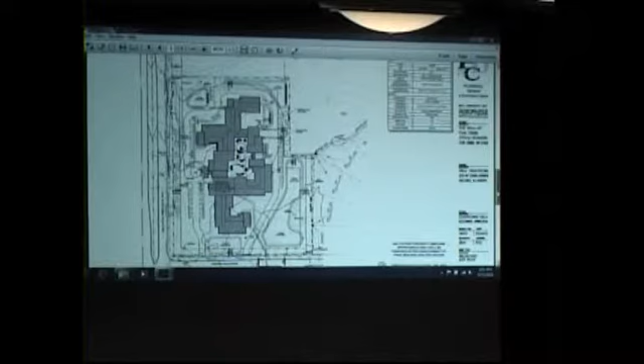In senior living terms, it ranges anywhere from independent living apartments all the way up to assisted living and finally skilled care nursing. It's based on the level of care and how much daily assistance residents require. For a skilled nursing facility, staff supervise residents 24/7, with reduced shift numbers at night. Skilled nursing requires the greatest amount of care in the senior living spectrum, so yes, it is a nursing home.

But by the same token, is there kind of independent living going on too? This will not have independent living. It will all be skilled nursing. Okay, so it's a nursing home.

Okay, other questions or comments? I see none. Need a motion on 4A.

Going forward, is there anything else from the public, Steve? If you have a comment, you can come up and express it. I just have one more comment too. Sure, go ahead.

We gave our thoughts that 96 stalls would be fine for the development. I also have some questions on the architectural portion, though I believe I have an earlier version. It states the facade of a manufacturing, commercial, office, or institutional building shall be finished with an aesthetically pleasing material, with a minimum of 75% of the perimeter finished with glass, brick, or decorative masonry. That's quite a high percentage compared to what I've seen from other cities.

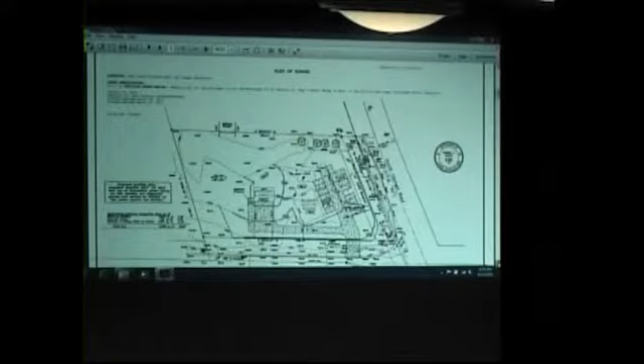This request is for site, building, landscaping, and lighting plan approval for the mixed-use building, which is at the location shown in red on the screen. This gives you an idea of the proposal, a two-tenant or mixed-use building. It'll be split right down the middle, so the business portion will be on the east side and the residence will be on the west side, including parking along the east and a private garage with dumpster location on the west.

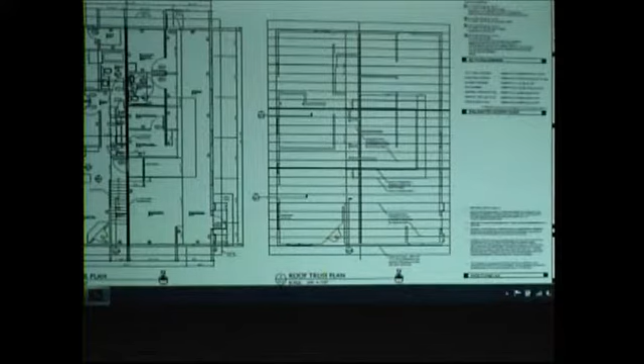To give you an idea of what the building will actually look like, this is a floor plan showing again that the business portion is on the east side and the residence with a full basement is on the west. It's a single-story building with the exception of the basement, about 2,000 square feet. This gives you an idea of what the building will look like.

Just lost my place, sorry.

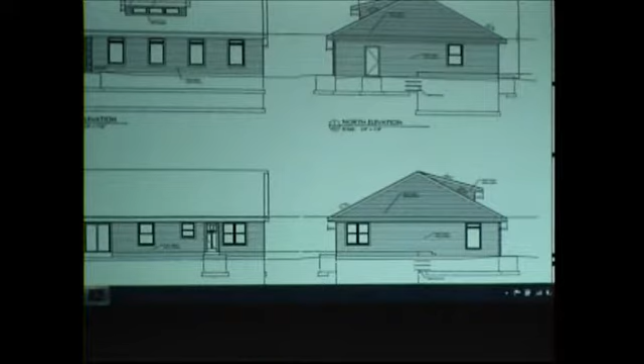Fiber cement siding on all elevations. There is going to be an entrance enhanced with veneer stone pilasters and sconces. So if we're looking at the entrance to the business portion, it'll be right here. Again, siding on all elevations, and this is going to be architectural shingles.

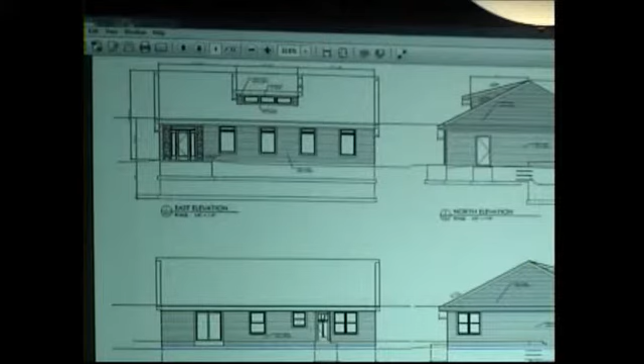Residential quarters for an owner of a building and business, not exceeding the floor area for a business within the same building, is permitted as an accessory use in the district. There is one error: B4 is actually the highway business district, not the local business district, as was stated on the plans. There will be an 864 square foot detached garage, again for private use, that will not be counted as part of the parking for the business.

Sheet A5.1 actually does not show the correct scale of the garage, which is depicted on the screen before you. That needs to be changed, because at the current scale it scales to above what is allowed for the maximum height of an accessory structure.

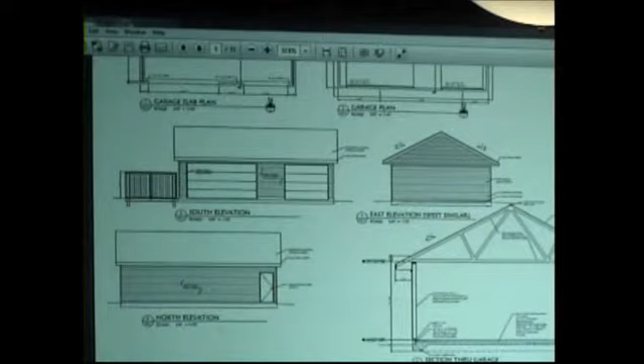There is going to be a trash enclosure on the west side of the garage. Those details are coming up on the screen below here. That trash enclosure on the concrete pad will be constructed of, I think, cedar panels. You'll notice there is a gate on the south end and then a gap right here. It'll be up to the Plan Commission to determine whether that gap should also require a gate, or if you're okay with it just being open like that.

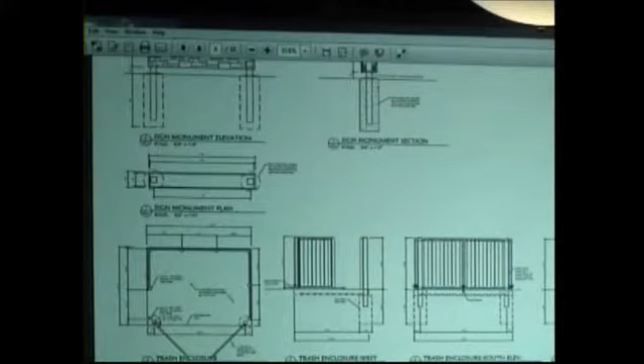Parking as proposed meets or exceeds the minimum required. All structures are going to meet the setbacks in the proposed plan, and landscaping has been provided on all sides. However, it should be enhanced in a few places. There's a requirement for a minimum of 3 ornamental deciduous trees and 5 shrubs for every 35 linear feet of perimeter parking area, which means 1 more tree and 3 more shrubs would be needed along this side. We would also like to see landscaping continued around this north corner and also along the south here, so it doesn't just stop, and provides a bit more of a landscape buffer to the residences.

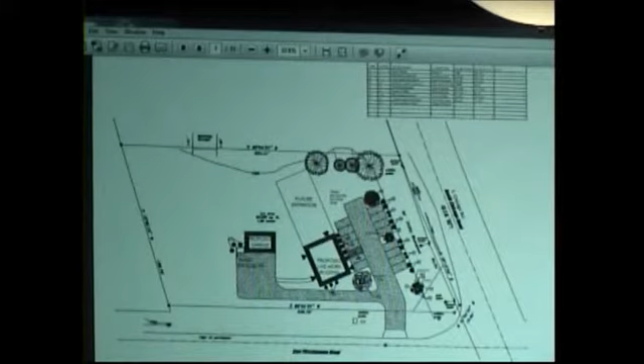Now we'll get a look at the renderings of the building. This is the southern elevation, looking toward the entrance of the business portion. If I zoom in, you'll be able to see a little more detail on the entrance, making it more visible that this is where people want to go. There's going to be a sconce on each side of these pillars and then a door here.

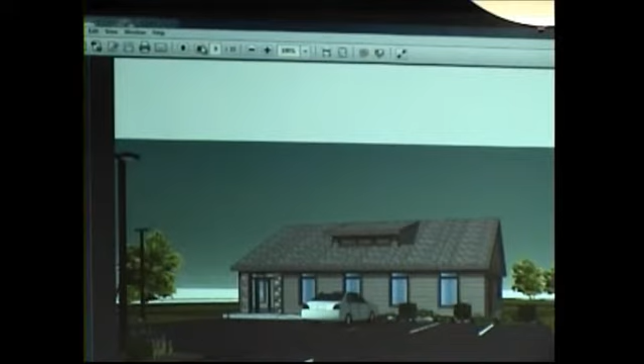Signage is not a problem. It will actually just be a permit, so it's not anything the Plan Commission needs to issue a decision on, unless you say there's something that is of issue.

Just another angle of the business side. Plan Commissioners may recall that there were billboards on this property. There was a letter issued by Clear Channel saying they would remove them by April 1st. Staff has included a condition of approval saying there should be a letter confirming that those billboards have been removed.

Preliminary lighting plans have been reviewed by the electrical inspector. However, final plans will also need to be reviewed prior to the issuance of building permits, just to confirm everything matches. There have been some comments received from the water and sewer utility regarding water service where it exists on the north side of the property, and some other requirements.

Staff recommends that the applicant coordinate these requirements closely with the utility. The recommendation is that the Plan Commission approves the site and building plans submitted by Thomas Kennard for the property at 9867 South Chicago Road, subject to conditions 1 through 7.

Mr. Mayor. All right, I'm super excited about this. I think it's awesome that we're going to see a small business on the east side of the city on Highway 32, along Highway 32. It actually echoes some of what we see in the marketplace, where the homeowner actually has their business in the same location.

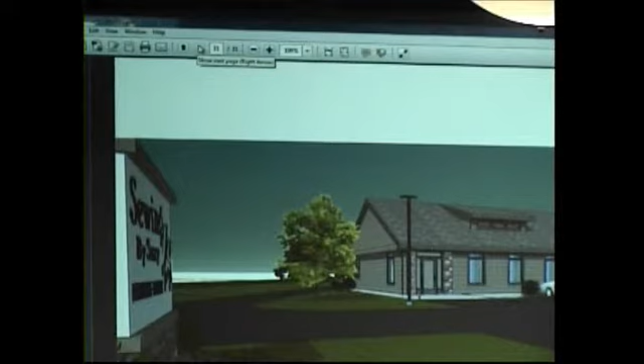Commissioner Dickman, I'd like to ask a question. First of all, I think it's a good idea, let me tell you that. But the first floor is divided between the business and residential. I noticed there's a downstairs in the residential heading to the basement. Is that going to be a full basement under both units? No. Okay, a full basement under the residential part. Okay, because I was going to ask if the tailoring area would use it, but you're not going to use it. No, strictly for them. Okay, thank you.

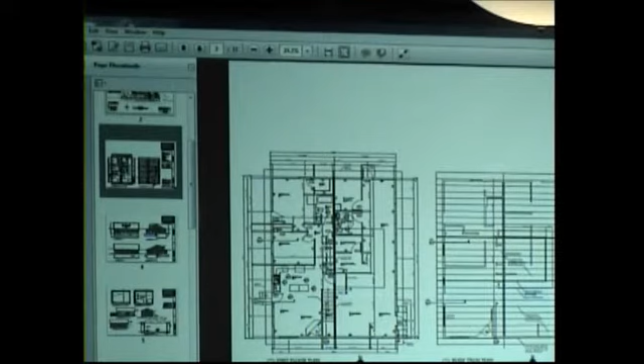Any other questions? Commissioner Chandler? I do have a question about the limit, the 17-foot limit. Can you provide more information? Because to my understanding, the drawing on A51 is at 30 feet, but it should be 17. Right. That's correct, to the peak of the accessory building. The peak of the roof should be no more than 17 feet. It's just a scaling error.

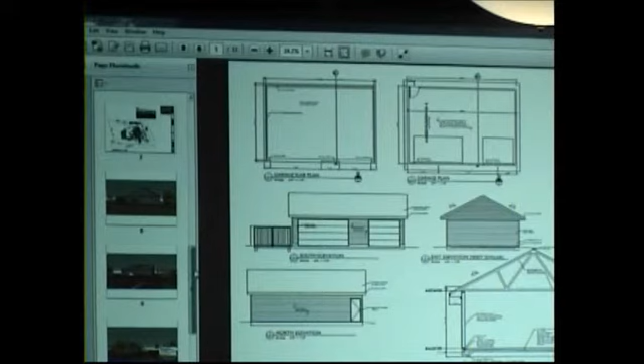Right, okay. Does that satisfy your question? Yes. Okay, Alderman Bekavich? I guess I need to be educated again. This is really unique. I like the idea of it with the split between residential and business. With the dumpster enclosure, because they're a business, I would take it they have private trash pickup, but as a resident, are they entitled to a recycle and standalone can like everybody else also? How are they treated? And then I guess also, from a perspective of business, are there separate services going in there for the business and the residents? And also, if they're a business, do they fall under any specific fire code for sprinklers, what have you?

Well, trash would be private. The fire department can answer the code requirements. I did speak with the applicant earlier on about his structure, and we did end up sending this into plan review. The applicant and I have had discussions regarding the structure, and we'll follow up with those discussions on any requirements for this building.

Okay, what was the other one that we were trying to find? I had a whole lot of them. Oh, the separate meters, is that what you were asking about? Oh yeah, just how they're going to, do they split the electrical? I mean, I can always ask the electrical inspector on the side. I'm just kind of curious because you're going to be metered business and residential. Right, it's almost like you have two separate structures in one. I don't know how they do it in the marketplace. Yeah, unfortunately, we don't have a response for that. Right, it would be a different department. Okay, not really applicable here, but wish you luck though.

It looks neat. Commissioner Chandler again? Could you provide more information about the gap with the gates?

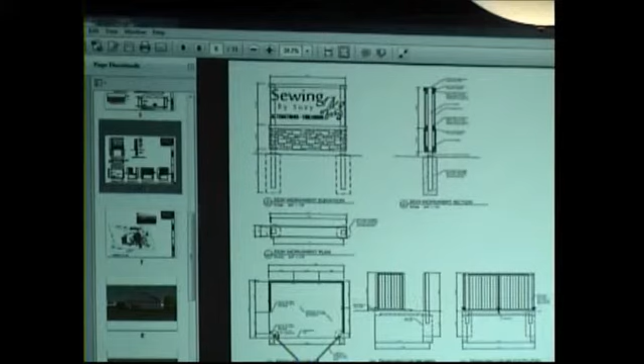Actually, I hadn't even noticed that, but I think the architect probably put that there to make it easy for us to take bags of trash in there without opening the gates. Okay, you might think about putting a transitional small gate so it looks like the rest of the siding, but closes it off so people aren't getting in there. That'd be my suggestion.

Did that answer your question? I have one more. Go ahead. I noticed there's a future expansion identified here, but I didn't see any verbiage about that in our packet. Can you provide us more information about the future expansion? We haven't given that a lot of thought, but we did position the building to the south so that if we ever considered that, we'd have space to do it. What she's getting into with her business may expand, or we might find it as an investment and want to lease it to another business at some point.

So is there anything we have to approve for this future expansion? What you're approving is the proposal. A future expansion is just that — it could or could not materialize. Okay, thank you. Mr. Johnson?

Tom, do you think you're going to have a dumpster out there, or just carts? My concern would be the garbage trucks actually coming up there and picking up. When I talked to Scott, the architect, I told him to make it accessible to a truck.

As a practical matter, we don't need a dumpster. Her business might create one trash bag a week, just pieces of materials and things. There's no paper, nothing consumed there, so it's really going to be minimal. The only way we'd have a dumpster is if it was required.

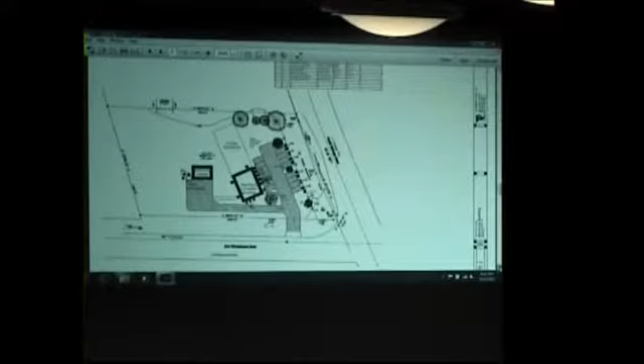Any other questions, Commissioner Chandler? And with the removal of the billboard signs, can you provide us some information about the status of that? Actually, I drove by today and they had started, so they're on their way down. Good, excellent, thank you.

Okay, any other questions? Motion on 4B.

Corral moves that the commission approves the site and building plan submitted by Thomas Kennard for the property at 9867 South Chicago Road with the following conditions: one, that all technical corrections — zoning district, scale, et cetera — are made to the plans and resubmitted to the Department of Community Development for review and approval prior to the issuance of building permits.

Two, that all building and fire codes are met. Three, that a letter confirming the removal of the billboards on the property is submitted to the Department of Community Development prior to the issuance of building permits. Four, that stormwater and grading plans are submitted for final approval by the engineering department prior to issuance of building permits. Five, that updated landscaping plans are submitted for review and approval by the Director of Community Development prior to the issuance of building permits.

Six, that final lighting plans, including luminaire details, pole lights, height, and color, are submitted to the Department of Community Development for final approval upon written recommendation of the electrical inspector prior to the issuance of building permits. And seven, that all water and sewer utility connections are coordinated with the Oak Creek Water and Sewer Utility.

Can I interrupt here for a second and ask if there are any other conditions the Plan Commission wanted to add in terms of the gate or the concrete pad for the dumpster? I would ask the applicant to close off that gap, put a little utility gate that matches the cedar siding on the rest of the structure, so it's completely enclosed. The pad is really up to what they find out. I would just add condition eight, that an additional gate closes the gap.

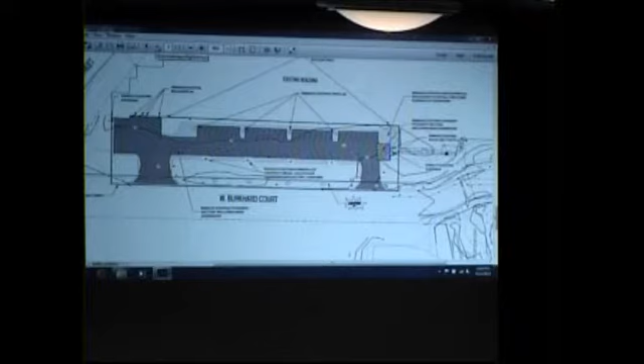The staff recommendation on the overall project is that the Plan Commission approves the site plan submitted by Gerald Ritchie, Nucor Cold Finish, Wisconsin, Inc., for the property at 400 West Burkhardt Court, subject to conditions 1 and 2.

Mr. Mayor, the applicant is here. Questions? Commissioner Dickman. I think the applicant's here, do you mind stepping forward? Good evening, my name's Jerry Ritchie, I represent Nucor, 7200 South 6th Street.

My question was, this is a pretty big expansion of that area. Is it for employees? Is it for people coming to see your product, or are you expanding inside? It's strictly for our teammates. And what's the reason for the need, is it needs to be wider? That parking lot's just not wide enough. It's a safety issue, really two reasons.

To the east, where the handicapped spots are, we have a severe drainage problem. Every winter into spring, when you have cold nights and warm days, that becomes an ice rink for us. So what really drove the project was the need to do something with drainage. Elevation's really a mess on this site.

The other thing is the current parking, the cars are just too close. When our teammates walk down the middle going to work, especially in the evenings or at night, there's a little concern with the room for them to move. It's compounded by our snow—you try to plow the snow away, but that sometimes squeezes it down a little bit more. So we're just making it a little wider. We're not really doing anything with more spaces or anything like that.

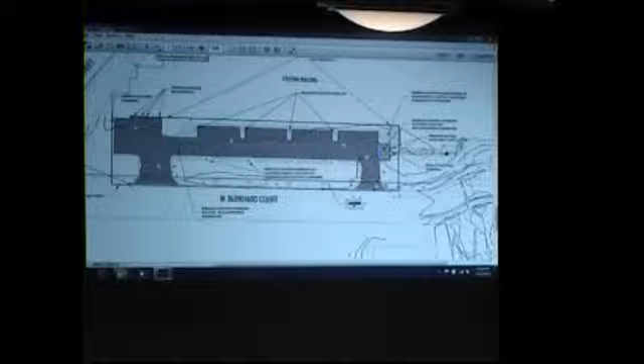I did notice there's an employee area outside with the tables. Is that going to stay? Absolutely, that will butt up against it. We're adding a few reserved motorcycle spots right against that. The new concrete will go right up against that area, which is all the way to the east of the drawing there.

Commissioner Chandler: I just have a question about removing the vegetation. What was the reasoning for wanting to remove that? Currently, all the rainwater from that building's roof just drains out. What we're doing is putting an underground drainage system in, so we have to dig up some of it to get that pipe in for the downspouts to go into it.

From a maintenance standpoint, we felt a nice lawn with grass cutting is a lot easier to maintain. But we have absolutely no problem keeping what we have, or even enhancing it. It will look better than it looks today when it's done. Is that acceptable to have? Absolutely. Is that part of number 2, the landscaping plans that will cover that? Yes, we'll do whatever we need to do, just to maintain it as much as possible. If you can enhance it, great, or relocate some of the stuff just to keep it there.

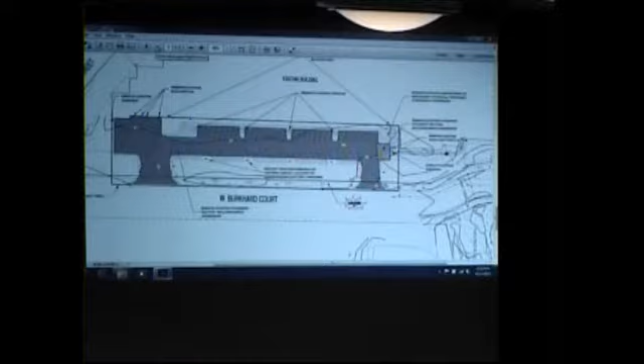Commissioner Chandler asked: what I heard you say is that you're going to include or create a drainage system. Yes. So are there any issues with engineering having a separate system installed on the property? This would be a private system, with inspection, and we've been working with them for some time, so we don't have any issues with it.

Thank you. Any other questions? Motion 4C.

Corral moves that the commission approve the site plan submitted by Gerald Ritchie, Nucor Cold Finish Wisconsin Inc., for the property at 400 West Burkhardt Court with the following conditions: 1, that stormwater and grading plans are submitted for final approval by the engineering department prior to issuance of permits; 2, that updated landscaping plans are submitted for review and approval by the Director of Community Development prior to issuance of permits. Seifert seconds.

Roll call: Dickman, aye. Johnston, aye. Grillo, aye. Gavich, aye. Scavidi, aye. Guzekowski, aye. Corral, aye. Seifert, aye. Chandler, aye. Good luck.

4D is a plan review for site, building, and landscaping plan submitted by Dr. Sarah Burmeister, Oak Creek Franklin Joint School District, for a proposed elementary school on the property at 2200 West Drexel Avenue. Tax key number is listed.

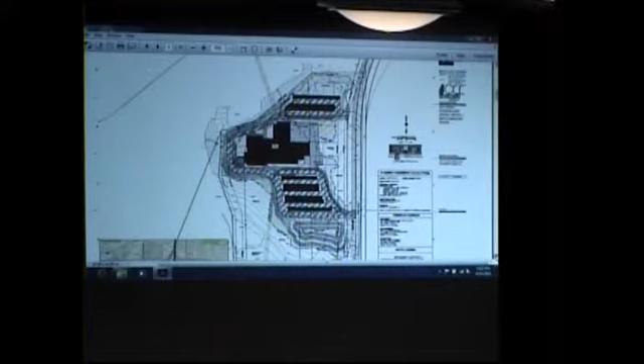The request is for site, building, landscaping, and lighting plan approval. As you'll recall, this property was rezoned to I-1 Institutional at the beginning of the year. This site plan shows what the property will look like once the school is placed on it. I apologize for the quality, we are getting cleaner drawings. What you can see here is an overflow parking lot to the north, the main building here with the play area, and the main parking area on the south with a detention pond. This building will be located about 600 feet from Drexel Avenue.

It's a 2-story building with a total square footage of 83,283 feet across 2 floors. This will include classrooms, a gymnasium, a cafeteria with kitchen, administrative offices, a media center, and a multi-purpose area. There will be about 525 students in grades 4K through 5th served by the school.

As proposed, it will meet all setbacks for the I-1 Institutional district. You'll notice that in the plans it was a little difficult to determine, but this area, which will be the main play area, will actually be softscape, not hardscape. The hardscape area will be here in the overflow parking area.

It's also a hardscape play area. Due to the presence of wetlands, floodway, and floodplain on the property, the building will be nearly 600 feet from the Drexel Avenue right-of-way to the south. Wetland impacts must be coordinated with and permitted by the DNR. No impacts to the existing floodway and flood fringe are proposed. It should be noted that the plans show floodplain instead of floodway, which I've been in talks with the consultants about. It will be corrected.

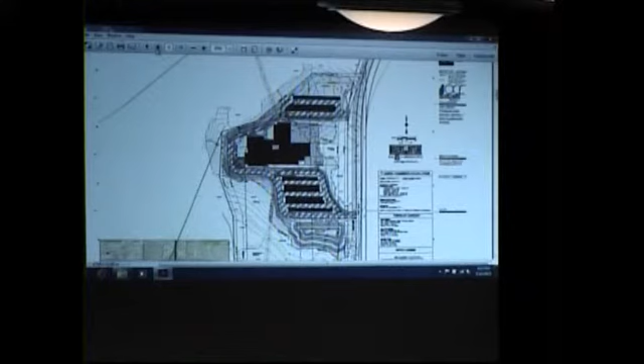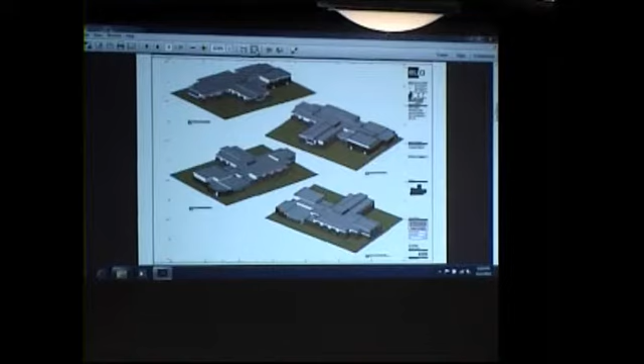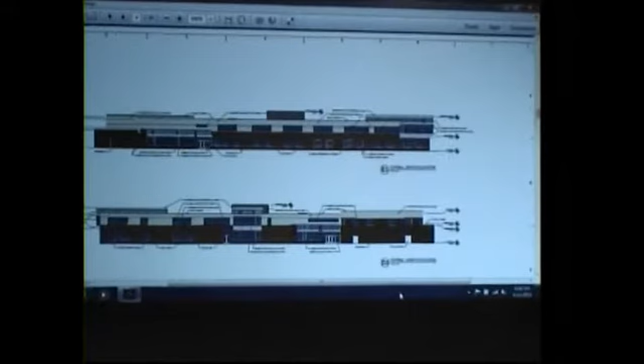So really the only people who would be seeing that side would be the users of the school at this point.

West elevation is again where the dumpster location and back of house will be. And then the overall east elevation, as you're coming onto the 20th Street extension and looking to the left to turn into the property. The building itself is primarily brick in contrasting colors with multiple windows, as you can see on the elevations. Architectural metal and composite wall panels are going to be on the second story.

We do have a breakdown here. Brick comprises about 42%, metal wall panel 28.6%, composite wall panel 5.9%, and glass at 23.5%. That's for the overall building. If anybody has any questions about the specific elevations, I have that breakdown as well.

You will recall that no more than 25% of the visible perimeter may be constructed with metal wall panels. However, again, the building is going to be about 600 feet from Drexel Avenue. It does apply to Drexel and the proposed 20th Street extension. Staff feels that the proposal meets the requirements of that 25% visible perimeter.

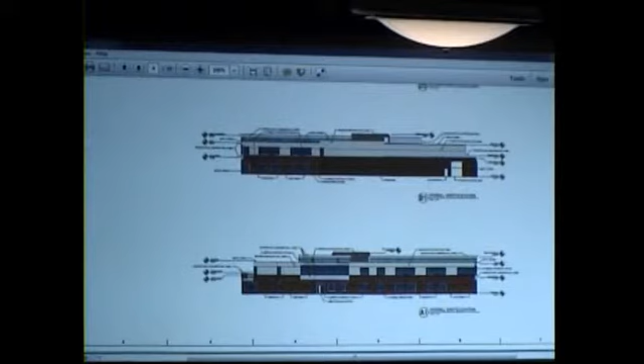Landscaping will be integrated with the wetlands on the property, which are shown on the plans, but they have not yet been delineated. You can see that surrounding the property, there are areas where wetland is called out. But again, the landscaping is meant to enhance and coincide with those wetlands, which will not be disturbed.

Just to note that all mechanicals must be screened. I think there was one item called out on the isometric plan that would be on the west elevation, on the west side of the building. That just needs to be screened either with vegetation or with a different type of screening. I think it will be vegetation, though.

Preliminary lighting plans have been reviewed by the electrical inspector. However, final plans will need to be reviewed prior to the issuance of building permits. We have received and provided to the applicant comments from the water and sewer utility, and we recommend that the applicant works closely with the utility to address those comments. The staff recommendation is that the Plan Commission approves the site and building plan submitted by Dr.

Sarah Burmeister, Oak Creek Franklin Joint School District, for the property at 2200 West Drexel Avenue, subject to conditions 1 through 8. Mr. Mayor, questions on 4D?

Commissioner Chandler: Okay, starting with the dumpster enclosure, where exactly is that? Can you provide us a little more information about the dumpster enclosure? I have been in contact with the consultants about the dumpster enclosure.

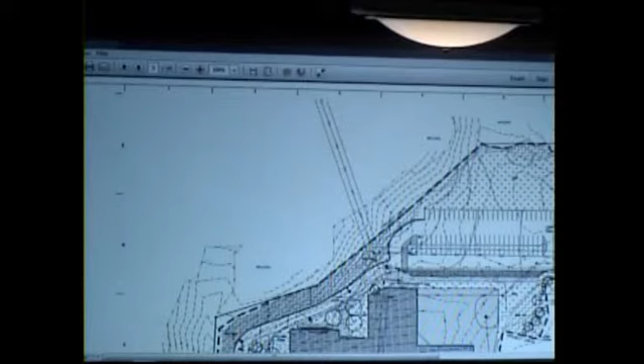The dumpsters are actually going to be located here on the west side. That enclosure is going to be masonry to match the building with a wood gate. Oh, I'm sorry, the gates will be steel substructure, if I can speak. Steel substructure with metal wall panel facing in the same color and pattern as on the main building.

It'll be about 6 to 8 feet tall for the dumpster enclosure itself, and also 10 feet tall for the transformer or generator, which is also in the same area. So brick masonry veneer to match the building, and then metal panel for the gate to match the building.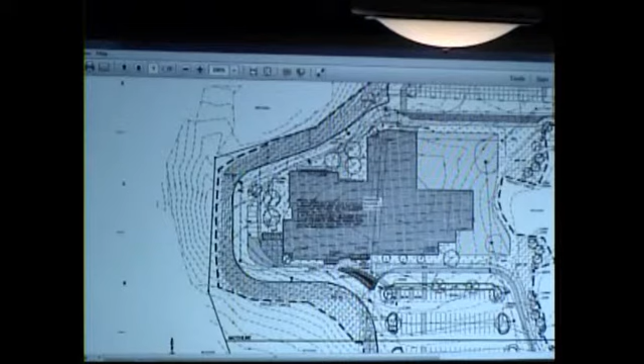And how's the dumpster access? There's a pathway that goes along here. When you come in through the walk, you go past that. Most cars will not be able to go past there, only the trucks, the delivery trucks, things like that. So there'll be a concrete pad back there. That pathway behind the school will also be used by fire and police for any emergencies.

Oh my goodness, it just started dripping on me. Yeah, you gotta be careful there. You better talk to your landlord about that.

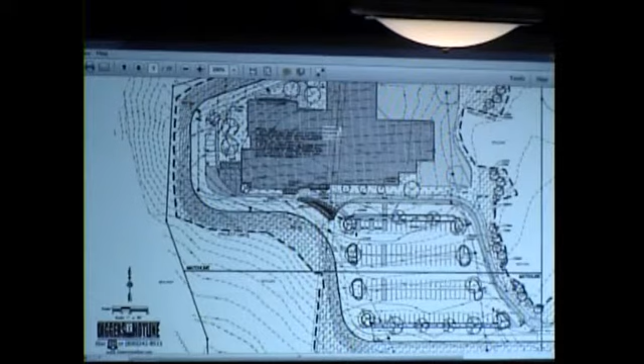So do you have to back in? What you'll do is, okay, I'm unclear of the location and how to access it. Here's 20th Street Extension, and I believe that this is a one-way up here, and then this will go around this way and up here. So then you have to back out? They will be able to, they can turn around in there, or they could continue around and come back out. They can continue up if they wanted to and come around. I am unclear of the layout of the dumpster.

Is the dumpster gates facing left or right? The dumpster gates will be facing south. So if this is the enclosure, okay, the gates are on the south. Okay, thank you. Oh, another question.

In regards to delivery trucks, where are they going to go exactly? Pickups, drop-offs, same place where the dumpsters are? That's where they drop off and pick up, there'll be a loading dock there. A loading dock? Okay, thank you. In staff's opinion, are there adequate room for the dumpsters and delivery vehicles? I believe so. Okay, Commissioner Dickman?

I wanted to ask about the hard surface play area, which is used for overflow parking. Are there going to be anything there, like on the ends for basketball goals, or is it going to be strictly wide open so the children can go out there under supervision and play, or is it going to be marked up, or what? If you look at most of our playgrounds at our elementary schools, they have like the 4 square games, things that are marked out on there, and they're a different color painting than the marks for the parking.

Okay, so I mean, the two won't be confused between the two? That's what I was worried about. No, we have that on some of our parking lots now that are also hard surface for playgrounds.

Okay, and then the other area was the impact of, like from the DNR, as far as environmental concerns here. Is this going to be a problem, or are we working with them? Brian can probably answer that better than anyone else. It's really the issue with the road more than it is with the school. Yes, and we're working with them on that. We've already met with the DNR once. We have some hurdles we got to jump through, but we are working with them.

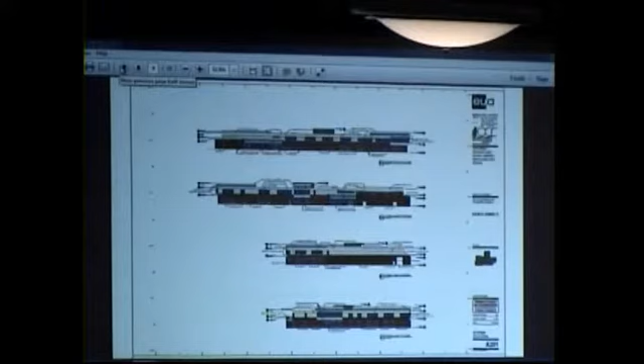Thank you, Commissioner Seifert. Yeah, I'm a little concerned about the wetlands on the east side, if you bring that back up. This area right here, I'm looking at the 100-year flood and so forth. Would we have a problem being so close to the wetlands there? Are we high enough?

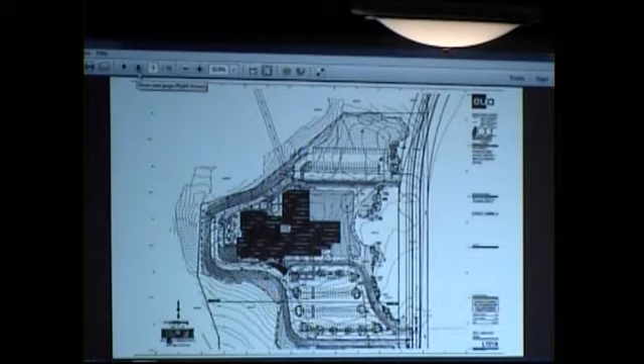If I can just interject, the wetlands and the floodplain are not located in the same area. The floodplain line is actually kind of diagonal, coming down here. That's the floodway and floodplain. The wetlands around it are not floodplain.

And then the road coming in here, is that in line with 20th Street south of it? It will align with it, yes, it will be in line with it. Significant discussions occurred around that linear approach.

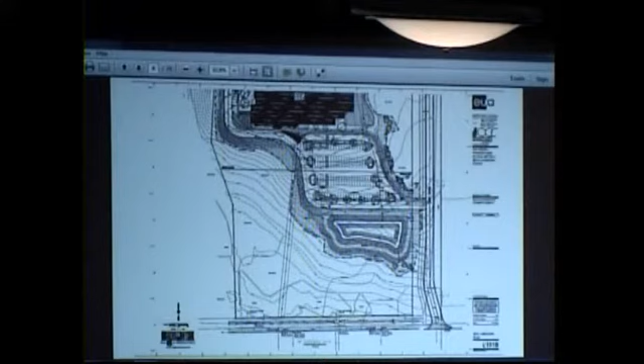Oh, and then there's a tree line along here, I think. I'm not sure if that's on your property or not. That's not yours? Right, no. Along the east side, there's a bunch of trees? We have planned for quite a bit of trees for screening.

And the fencing that Carrie had mentioned is on higher ground, and then the stormwater detention, that's a pretty steep downhill there, so it will appear to be much higher than it is. But yes, we're planning on having some vegetation to cover that up.

Brad, you're talking about the existing tree line that's right here? Yeah, there's a tree line, if you look right along on the east side. I think that was a buffer for the house that's on this side, but those trees are probably going to have to be removed to construct the road. That part of the house is also going to be moved.

Okay, I just wanted to give the house some protection. The house is coming down, so yeah, the house will be gone.

That's it. Commissioner Carell. Just to Commissioner Chandler's question, or procedural - I don't really care which color brown, but does that come back to us? It's up to the Plan Commission if you want it to come back to you, or if you want the plans submitted to the Department of Community Development. Okay, I'm good with that.

Thanks, I'm fine with that. Commissioner Chandler: Can you provide information on safety measures within the school for the children? What's that got to do with this? Related to what, security?

As far as the site and building plan. Yes, we have the secure entrances that we have at all of our buildings now. And what does that entail? When they walk into the front door, they aren't able to - they have to get buzzed in to get through the first set of doors, and then they are directed specifically into the office. They are not allowed to go through the second set of doors. So they have to go in through the office, check in, do all of that. It's the same thing we have in our other schools.

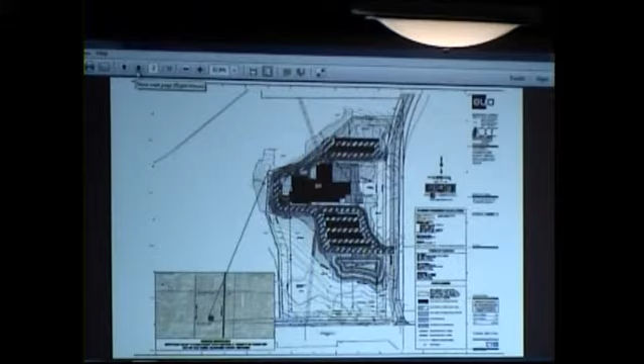Four, that updated landscape plans are submitted for review and approval by the Director of Community Development prior to the issuance of building permits. Five, that all mechanical equipment is screened from view. Six, that the final lighting plans indicating luminaire type, pole type, color, and height are submitted for final approval by the Department of Community Development upon written recommendation of the electrical inspector prior to the issuance of building permits.

Seven, that all water and sewer utility connections are coordinated with the Oak Creek Water and Sewer Utility. And eight, that the stormwater and grading plans are submitted for final approval by the engineering department prior to the issuance of building permits. I just have one item to include if possible.

If we can also, for number 3, not only for the dumpster but for the school as well, the materials. I think that's details for the colors, materials. Is it only for the colors, for the gates, or is that only for the dumpster, Kerry? Dumpster enclosure and building. How's that for an amendment?

So they talked about the colors. You said colors of the buildings would come here or go back to community development. It would come to community development for final approval. Yeah, we can add the building as well. That's a good point.

Okay, Dickman seconds, roll call. Dickman, aye. Johnston, aye. Grillo, aye. Kavich, aye. Sweetie, aye. Guzekowski, aye. Corral, aye. Seifert, aye. Chandler, aye. Good luck. Thank you very much.

You're welcome. Item 4E is a certified survey map submitted by Jamie and Sean Cook, dividing the property at 10751 South Nicholson Road, tax key number as listed.

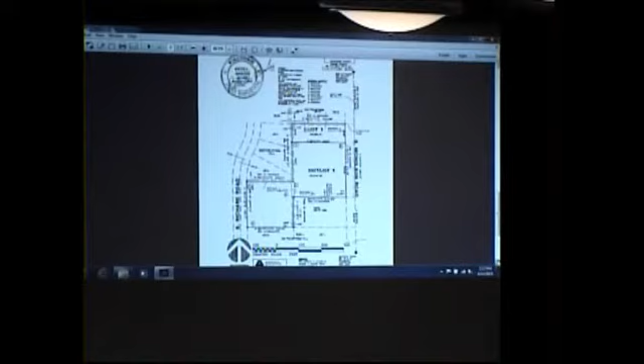Good luck on your new home. Good to see you, Carrie.

All right, last item of the night: zoning text amendments. Review a proposed amendment to section 17.0706E of the zoning ordinance to allow pole signs in the M1 manufacturing district, submitted by Larry Hazy, JX Enterprises, JX Peterbilt. Applicant is here. Pete?

Testing, all right, we're on.

Okay, the mayor did explain what the recommendation is for amending the section of code.

A little background: back in 1999, pole signs were permitted in all zoning districts. They were allowed to be 40 feet tall. The requirement was a 12-foot clearance from the bottom of the sign to the ground, and they were allowed to be 400 square feet in area.

Since then, it's a little different. We now restrict the height of pole signs to 25 feet, eliminated the 12-foot clearance from the bottom of the sign, and reduced the maximum size to 100 square feet. The history behind that change was that as part of the comprehensive planning process, a vision and character of the community was created, and policies were developed to improve the character of the community.

As a result, pole signs were minimized and ground signs were encouraged to be installed throughout the districts. One of the things they also did was restrict pole signs to only the B4 Highway Business District, reducing the various districts which could have one.

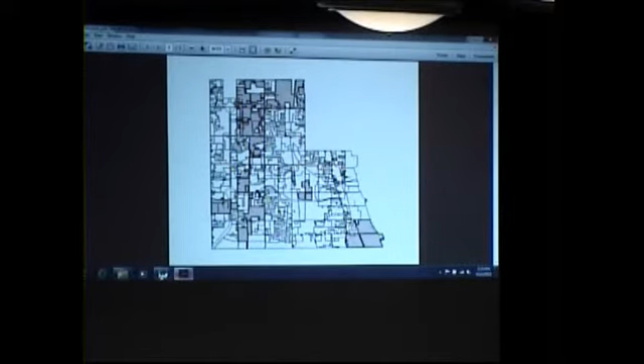Marty from Badger Lighting and Signs: I understand that concern, but that's a rather heavy concentration of businesses right next to each other. Yeah, it is. We don't really have that at the Peterbilt location. No, it's a 6-acre plot. That's a good point. But this isn't just about Peterbilt.

We're again looking citywide at M1, and unless the Plan Commission wants to recommend an arbitrary distance from the interstate, which I would not recommend, that would be something that limits it. I think you'll find other businesses in the M1 district crying foul that this body came up with whatever distance from the freeway to consider permitted and not permitted.

Alderman Guzikowski: Well, since this is in my district — number one, it's got to be almost a year ago, or less than a year, when they were here for the original sign request. Is that correct? December? So, 4 months ago. All right, sorry, seems like... No problem, time flies.

So, I agree the pole signs are a slippery slope, but what can we do? What can we do to help them out with a sign here? I know a monument sign's not going to cut it for people to see from the freeway, but what can we do to make it work for them? Is this something that needs to go further, at this point, so they can look at anything?